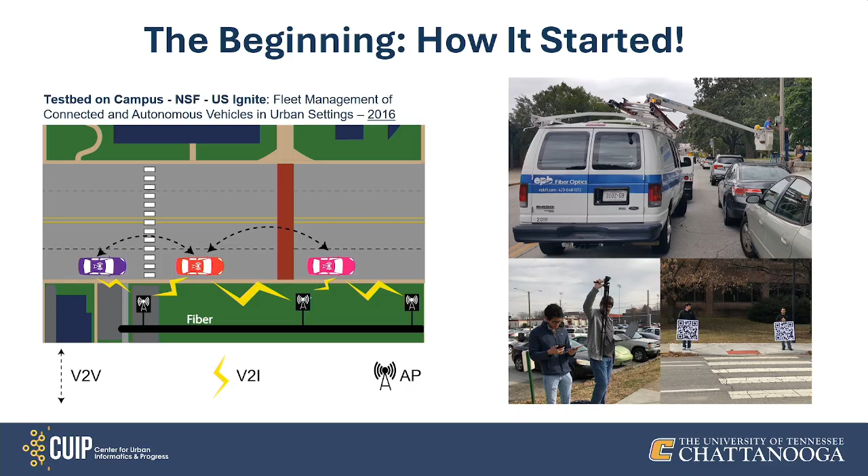And it worked. We did a live demo in Austin, Texas, as part of the World Congress for Smart Cities. It worked, we showed the impact and everything.

But that was also when we realized where the challenges are that we have when working in the world of ITS. Number one is lack of data, lack of real world data. There are a lot of test tracks or offsite places that can collect data, they have data, but what data do we have that comes from the real world, and also diversity of data, the data that shows how the system works under different environments in terms of weather, in terms of geometry of the roads and all of that.

And also quality of the data. If the data we collect, whatever it comes in, how can we work with it no matter how it comes. And also, being able to, so we have the data now, but what are the things we can do with this data, and how can we actually test it and see the impact of it, again in a real world scenario.

With all of that, we started, as I mentioned, with the academic, government, industry partnership to get the idea, develop the algorithms in the lab, get them out, test them, and then see the impact. At that point we see what we want to do after that, like how do we want it: is this a scalable solution that can be deployed, which I'm going to talk about some of those, or is this something that was really good research that we published and we can move on.

With all of that in mind, this is where we are today. So we started with those QR codes and poles, cameras on poles, but now our technology has been deployed. You can see this intersection is about probably close to a mile from the Aquarium. If you go down Broad Street to MLK, and when you hit MLK, if you look at any intersections from Highway 27 all the way to Central, you will see a combination of this.

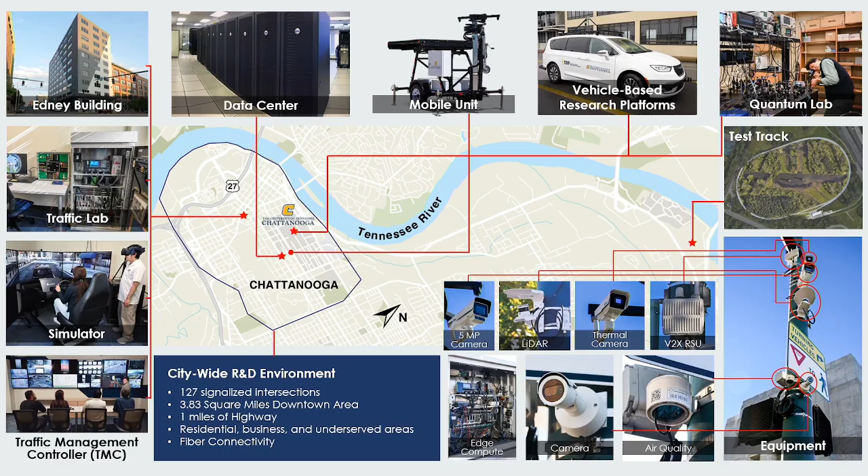Some other things I'm going to be talking about, this is just a general slide of some of the assets, some of the facilities we have, how we really do a lot of our work. We collect all of that. That's a real world; we collect a lot of that.

One of the things is, whatever algorithm we develop, I really want to test it before going out and taking a street to test it, because that's not the safe way to do it. So we do have a lot of capabilities to test it on the test track that you see there, that's an area about 6 miles, a campus where we do some testing. On the left side, we have a traffic lab where we do some studies. We have a connection to one of the intersections where we test some of the technologies. We have a simulator that we do a lot of testing on, and I'm going to show you that. And we have a team that tests some of the technologies there.

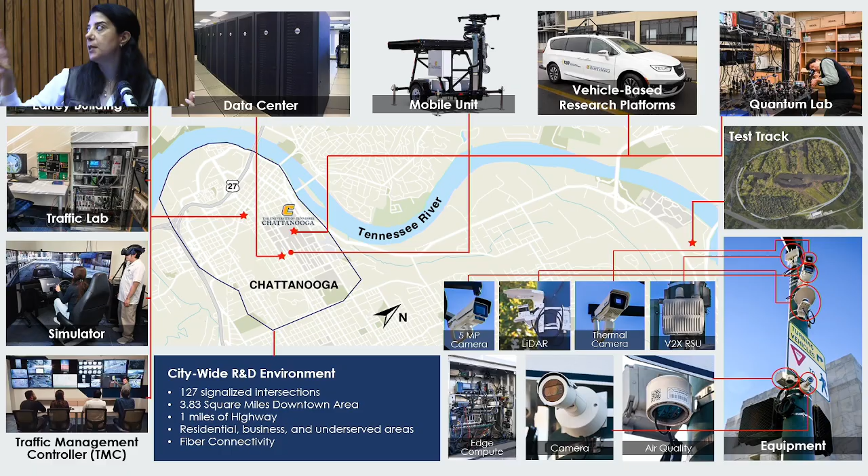But the beauty of this is it's not just hardware. A lot of time was also spent on the data infrastructure part of it, and we call this test bed as a service. Because, while I come from a computer science background and do a lot of data analytics, we don't expect everyone who comes to use this test bed to have that background. They actually have other expertise that we don't have. So this is the way we have provided access.

Everyone can have access to the data. There is an SDK they can use for remote access, and we work with several companies and other universities, and Oak Ridge, who have access to our data that they can work with.

Currently, if I remember the number correctly, we collect over 2 billion data points a day from just that intersection. So there's a lot of data that we collect. One of the main things is we process the majority of that in real time, and we don't store any raw video data.

One of the things for us when we decided we needed this and built it was community engagement, and one of the very early privacy challenges, because this is a regular street, your business, people live there, people have businesses there. So one of our very first promises that we've kept is that no video is being stored.

What we do is collect the data from that. We know, and we call them objects because that's what it's called in computer vision, how many objects there were. For example, two people waiting to cross - we don't know anything more about them. There were two cars that had to wait, say 5 minutes on the red light. Those are the kinds of information we collect, and that's about it.

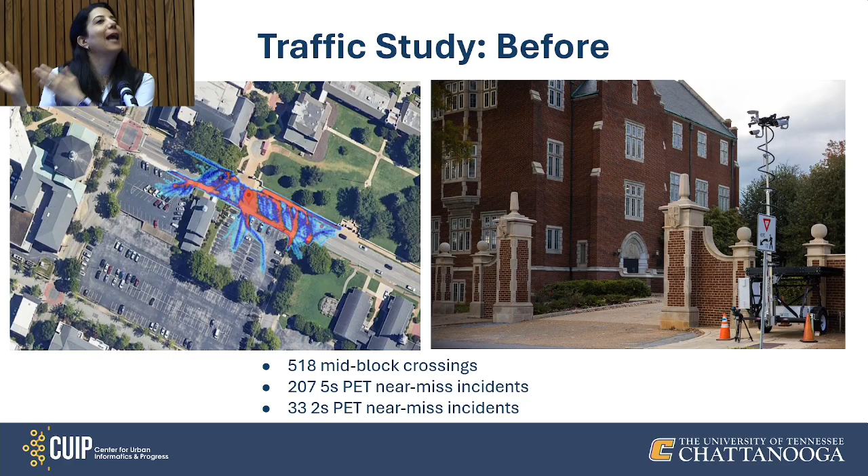We saw that 518 people crossed at mid-block, and they cross basically anywhere. One major challenge is the last bullet there: 33 cases where there would have been an accident within 2 seconds. Thankfully, there was no accident. Usually what happens is something happens and then we go back and look at it to see what happened. But this let us be proactive about it, because seeing 33 cases is an alarming number.

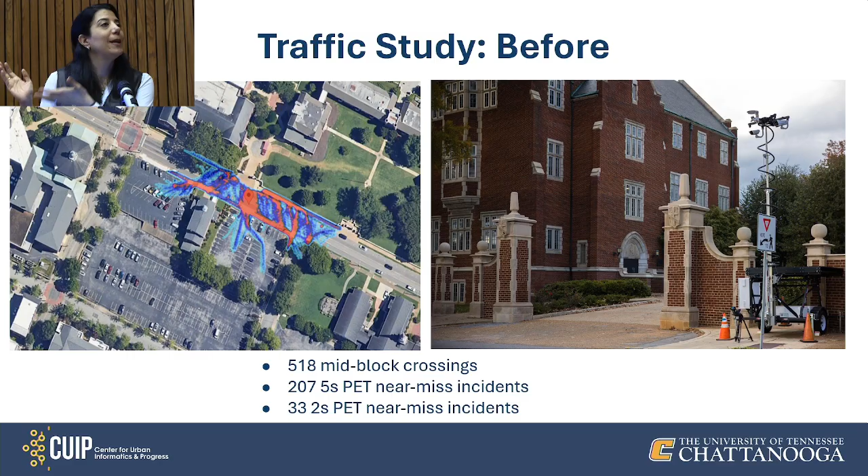These are specifically between a person and a car or a cyclist, not between two cars. We looked at a vulnerable road user and a vehicle. So we showed this data to Chattanooga Police Department, University Police Department, and City of Chattanooga Public Works, and they painted that crosswalk. Nothing fancy, literally just painting that crosswalk there.

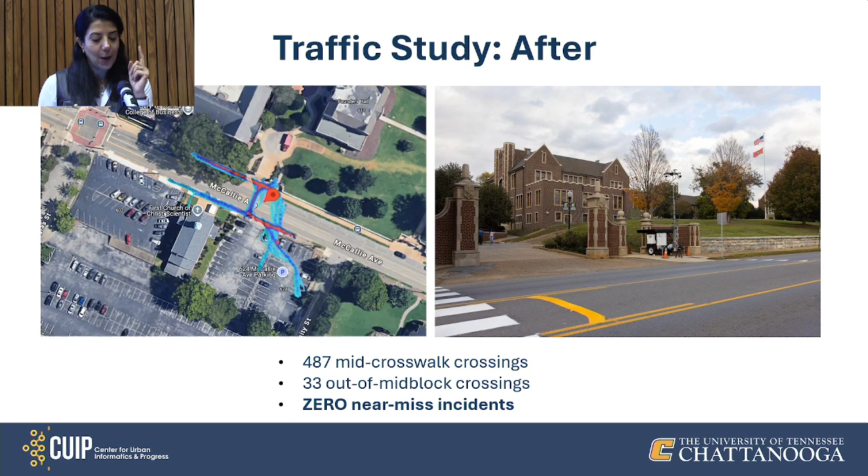We deployed the technology back for 4 days. The other one was 518 crossing. The results show 487 cases of very similar behavior, and the majority are now crossing at the crosswalk. There were only 33 cases of crossing outside of that mid-block crossing. But what I want you to see is zero near misses.

Now what I really want to show is what we are trying to do: see how can we proactively make the streets safe. To do that, we really need to have access to that data, analyze that data, and make a holistic view of our environment. That's what we have been working on.

One of the other things that has become very relevant for us, as a university, we usually do not look at economic development impact, because that's not in our criteria as faculty or students. But we have been working closely with companies, specifically in Tennessee, that like the work we are doing. You see examples of projects, for example working with them on risk assessment and post-crash detection. Denso has capabilities with these cameras and connected roadside units, and this is really being able to test their devices on the street and helping them develop the algorithm.

With LG, we are going to be deploying the first smart crosswalk. I was actually there last week for a visit with them. Smart crosswalks are everywhere in Korea, and you see the impact of it. They detect there is a person on the crosswalk and can alert, or in some cases when it's dark, just put a light on the person so they know there's not enough time to cross, or a car is coming that could potentially cause an accident. That would be deployed in Chattanooga - we are actually in the process of that. The other one is with the startup Aerobill.

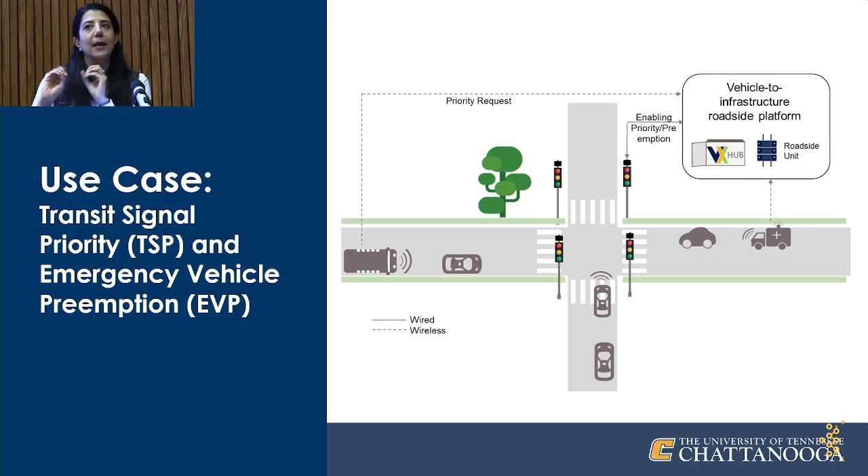So those are the things we want to be able to communicate. There are two things: one is preempt the road, but also being able to communicate so the autonomous vehicle or the regular driver knows whether it's on their path or not. The implementation we've done includes the OBU, the onboard unit, which is a unit we put on the bus or the emergency vehicle to be able to communicate that.

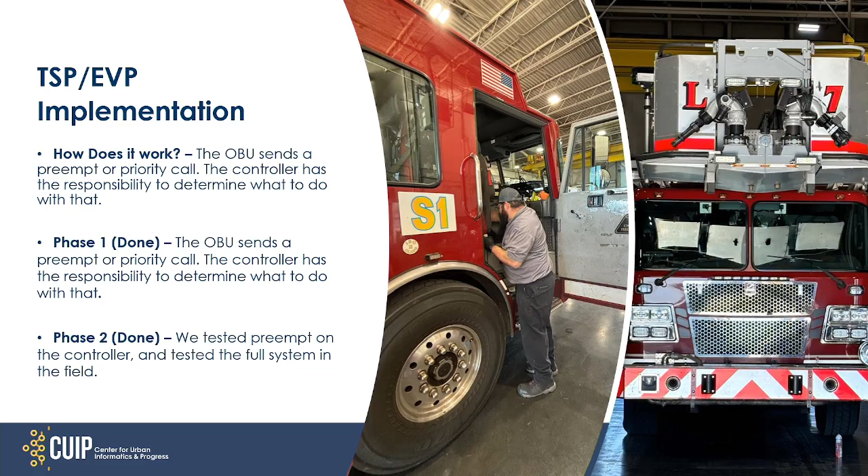And also really testing it on the streets to see how we do the integration. Our team has gone to the fire department - actually multiple fire trucks are now equipped with it - and we're making sure it will be able to do the communication. I have another video, but this is the case you'll see.

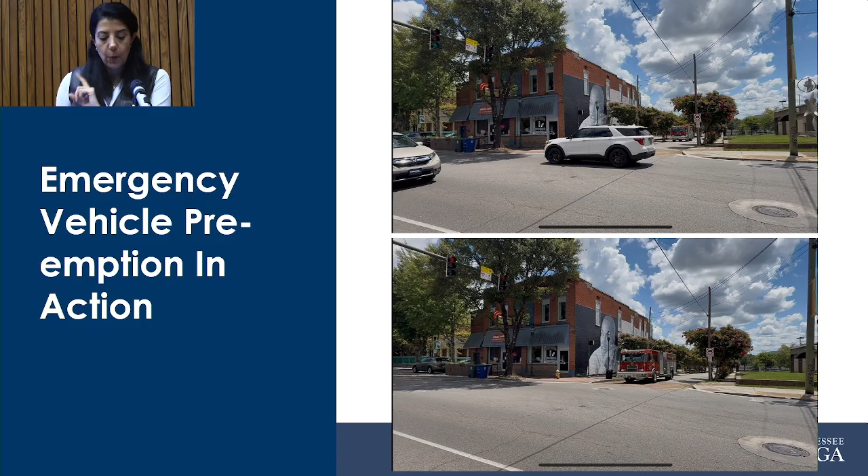You can see on top the emergency vehicle is coming, the light is green, red on top of that. But before it gets here, you see the other side is green, so the cars were going, but before it gets there, it had already stopped the traffic, giving the right of way to the emergency vehicle. I want you to pay attention to this part about the phase status and the pedestrian.

This is MLK and Market Street. You see the emergency vehicle, the fire truck, come from the bottom and go to the top. They already had the green light, but it's also making sure it's locked - you'll see the vehicle come, and then the phase status locks the other ones on red, including the pedestrian signal.

That's another challenge when we talk about the real world - we actually had a case where the light was already green, so they didn't have to do anything, but we needed to make sure it extends the red on the other side, because it was actually ending, and it made sure all side pedestrians were also red.

One time when we were doing the test, there was a pedestrian, and this was done in the lab - we emulated it, we weren't on the street doing it. There was a pedestrian there, and there's a minimum time to allow it, which was 3 seconds, but that was not enough for that person to cross. So we need to consider all of those conflicting cases before being able to test it on the street.

Another case is cooperative perception. Cooperative perception is specifically important in the case we see on the right side here, for midblocks.

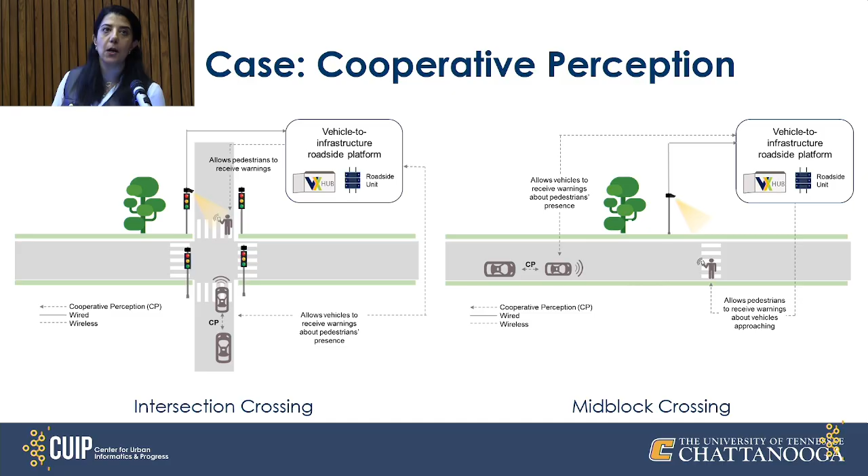In fact, there was an unfortunate fatal accident here in Chattanooga a year or a year and a half ago that happened exactly that way. Somebody very early in the morning crossing at the crosswalk, but the car did not see it because it was completely dark. So this is the type of thing we are doing two things about.

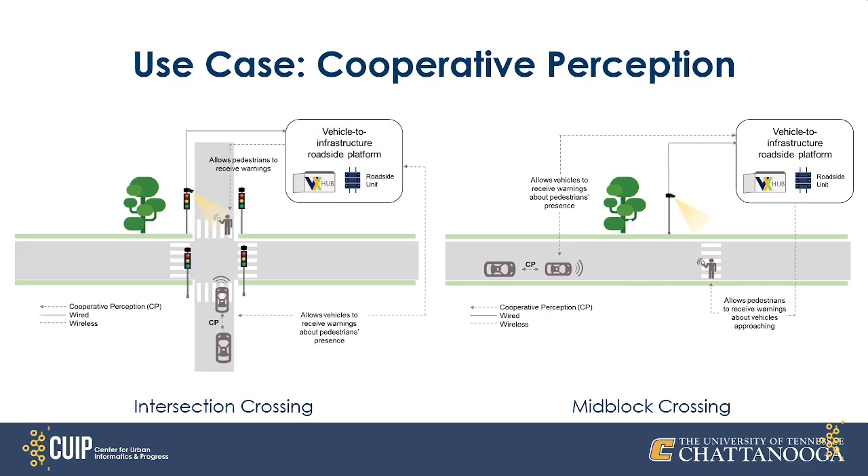One is if the person is seen, it's broadcast, so the car would know that there is a pedestrian on the road. The other thing we're doing is working with another industry partner on a light that lights up when it's dark to show there is a person on the road. So these are, I'm going to show you a couple of quick examples.

So what you see here, this is MLK and Central. The one on the right is a camera view. The one on the left is a LiDAR, which we use for all of our research projects, and it's actually deployed in the city, so they use it for other purposes too. And what's in the middle is what the driver sees.

So the little yellow figure is the person that was walking. And you see on the middle view, all of a sudden the PCW, pedestrian in the crosswalk, comes up so the driver would see it. We do it both with a message coming up on the screen and also sound, so the driver becomes extra alert.

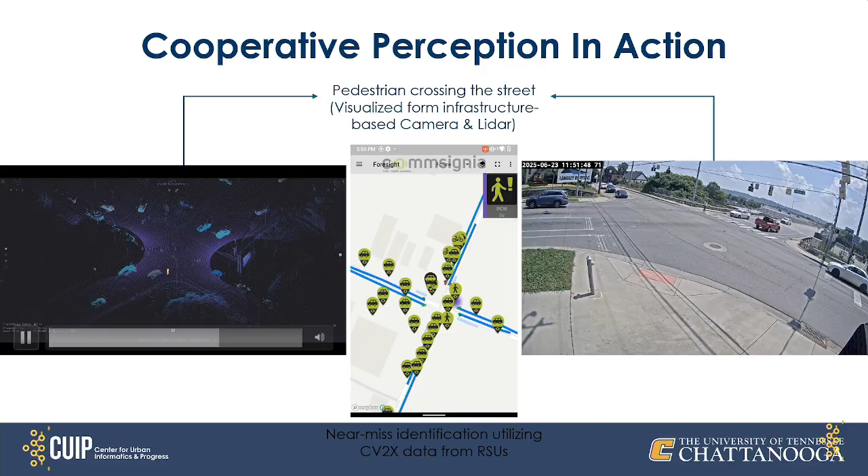But we have also defined zones so that only when the pedestrian is in that zone does it trigger, because one of the challenges we have is distracting the driver and distracting the pedestrian. We don't need additional information to distract, but when it's important, we need to receive it. So what are the zones we want, and what is the time threshold we need to really convey that message - that's what's happening there.

Another example, and this is the case with one of our partners in this project, Audi. Audi has actually integrated that into their HMI. So you see that person - that's the way they would see it. It's right there in front of them on the windshield, and then there's a sound that comes up, and you would see this person coming up with that as well.

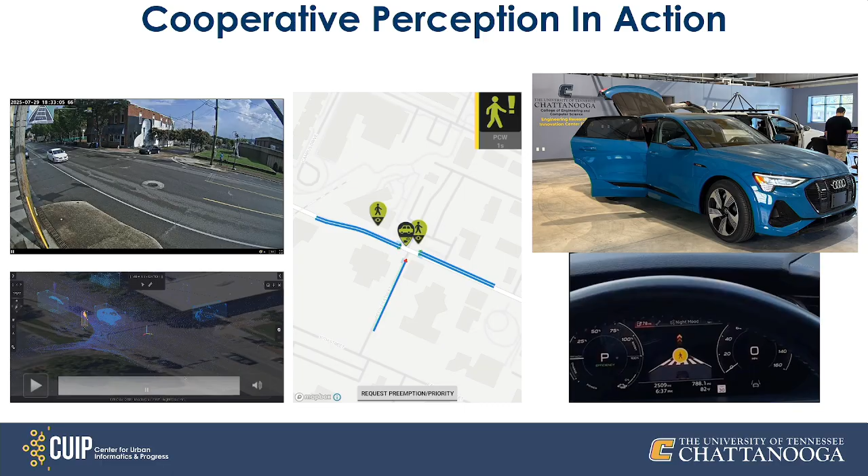It's a crosswalk - this is mid-block. That part is like the actual crosswalk, and the pedestrian walking is on the other side. So that was the case that we also tested.

Okay, so another part - I'm shifting a little bit from connectivity to digital twin. One of the things we have been working on is building the digital twin of this. Because we have a lot of data, we collect all of this data basically 24/7, and we have built this twin.

We have built the twin more accurate for the corridor, because the camera data comes in at 30 frames per second, and we have signal phase timing data that comes at 10. So we have really accurate data - we can build a real twin of that.

We also understand that's not always the case, because in some places we don't have that technology. But even for that, we have looked at average days based on the OD data we receive from our planning agency, and we have built a twin for that.

We have done several projects so far - I'm going to talk about one here. We did a project where the city wanted to see, they were planning a road diet on one of the streets in North Shore. And we modeled that, which is what helps, because we can do a lot of safety analysis on the twin, so we're able to see before and after.

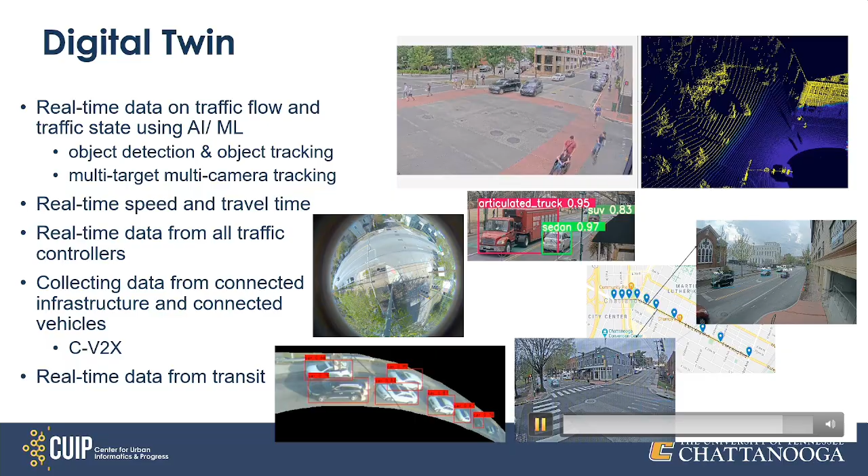So we do not look at license plates. But we also want to understand if the vehicle passes through multiple intersections, we want to be able to know that - for example, to know what the travel time was. That would be the only way for us to understand that.

So this one at the bottom is actually that - it's multi-camera, multi-target detection without using any identifiable information. Based on that, we have built a twin. This is MLK - what you see in the middle is MLK, a 2D version, and this is the system we were talking about earlier.

This is a 2D model of MLK, and everything you see there comes from the real world. The number of vehicles, the status of the light, how many vehicles were in the queue, all of that is in real time. But the colors and type of vehicle are random. We've done this for all parts of the corridor.

So how did we use this? This was actually in partnership with Georgia Tech, University of Pittsburgh, and Oak Ridge National Lab. How did we use it? I missed that slide, but I can explain it.

One of the projects is adaptive traffic control. We wanted to understand how we can optimize traffic controllers so they react to the existing traffic status. A lot of traffic controllers look at loop detectors, cameras, LiDAR, or similar inputs.

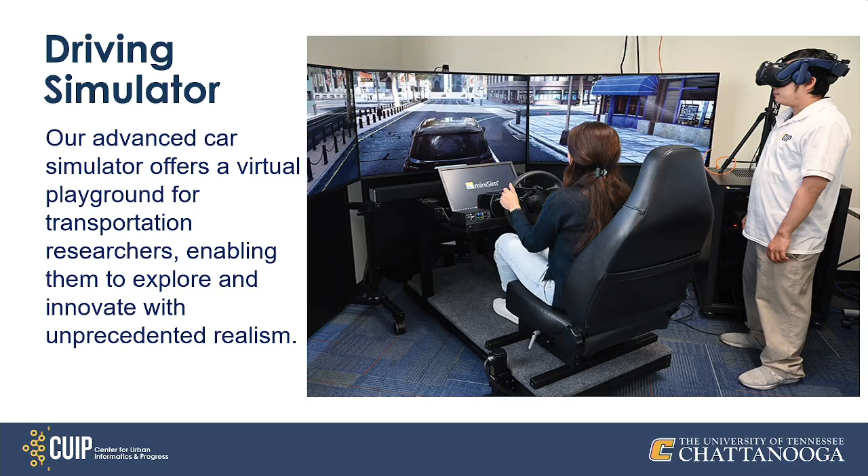The other way we are testing that is using the driver simulator. We have the digital twin of our corridor there, and we've done many different tests for both autonomous and regular driving with the driver. We put people wearing VR so they think they're on the road, and see how they would react, especially the interaction of human behavior with pedestrians and autonomous vehicles. We really built the model to be as accurate as possible.

So this is the MLK corridor, and this is the model we've built. It's almost the same, down to the pavement type, the signage, all of that. We created a very close 3D model of it, and we've run many different test cases.

You can see how those people were standing there, but the age, height, and clothing are things we randomize ourselves. What matters to us is how long people waited to cross the street, which relates back to the adaptive traffic control work I mentioned.

I don't need to tell you all this since you're the experts, but when I'm talking to computer science people about optimization, we can't just optimize the road for cars. You can't just say pedestrians should stand there for 5 minutes because I need the cars to pass through to improve travel time. That's why it's important to account for all modes of transportation.

Another project we're doing is on driver distraction. We use meta glasses, which is what you see that student wearing, to look at where drivers are looking while driving. We provide different distractions, testing these scenarios multiple times with many different students, to understand how things change when the type of road, curves, and so on change. We also study the grip and position of their leg.

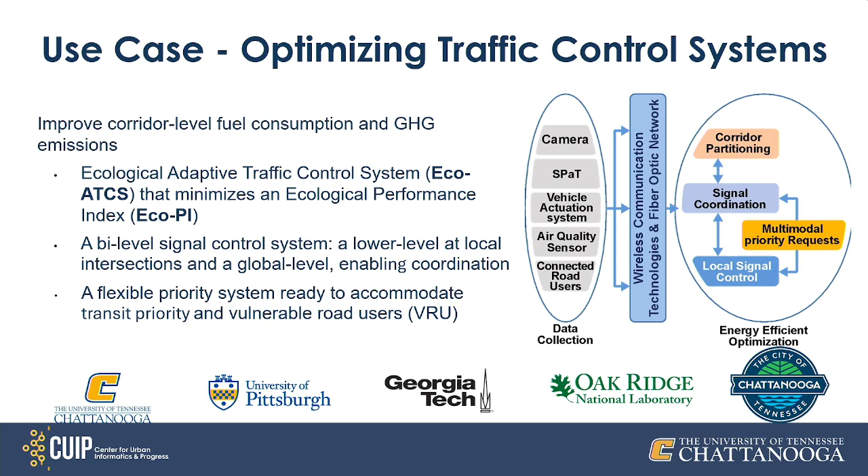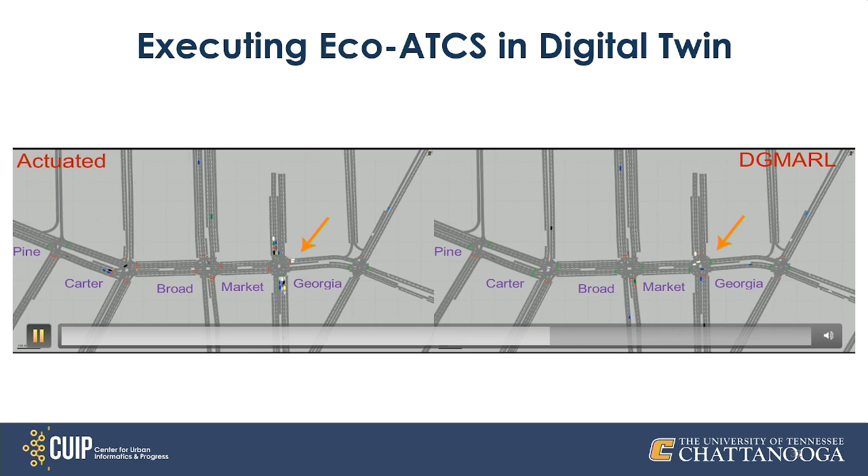We have tested this over a long period of time, on peak time and non-peak time, over several days, different times, different seasons, and all of that. We had to fine-tune the algorithm multiple times.

One of the other things is because of our partnership with Oak Ridge, we were able to run it in a hardware in the loop. We were collecting this data for one of the vehicles that Oak Ridge lab has, running the code, and we actually measured how much energy it was using and how much emission it generated.

The last thing I wanted to talk about is related to autonomous vehicles. One of the projects we also have is related to automation and connected vehicles. We have the vehicle in the bottom, which is a regular vehicle. It's not even level 3, probably level 1, because it does not have any intelligence. But what it has is we have added the onboard unit.

You see those triangle or cone-shaped antennas on top. Those provide us the connectivity, so we know where the vehicle is and it knows it can communicate. At this point, all it knows is it can communicate to the traffic controller, so it knows how much time is left on the red and that type of information. The vehicle and the traffic controllers know how many cars are coming to understand the messages they send.

The vehicle on top can actually be a level 4, but we are using it as a level 3 because up to this point, Tennessee has the rule of having level 3 vehicles on the road requiring an operator in the vehicle. It can be fully automated, but we are using it as level 3. The application isn't building a vehicle that's fully automated — this is a vehicle retrofitted through our partnership with another company. We added the sensors and built the algorithms with them.

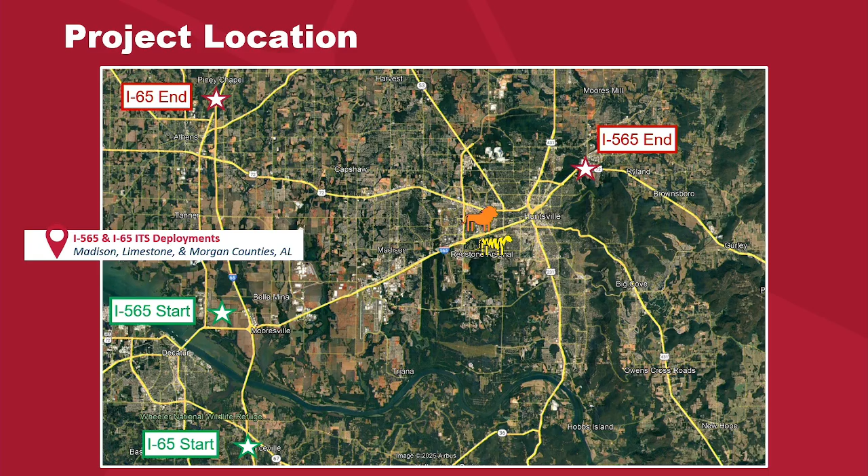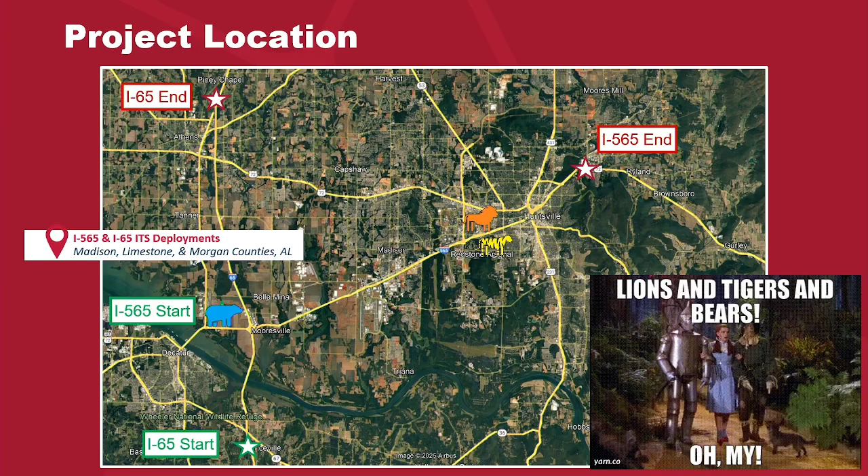There's also a district office. The Huntsville district office is right down the street, so we had connections tying back to there. They have an IT server room as well. Then the Tanner district office, on the west side, connects the west region to the east region, combining the west area with the east area to make our north region. So you have the district offices, regional TMC, and all of that needing connection.

There's also a lot of regional coordination as part of this project. Alabama DOT is obviously the main client of ours for the project, helping us do this work, but Redstone Arsenal was also heavily involved. If you look across the 565 corridor, you can kind of see Redstone Arsenal under the Tiger, but all of that land is like 60 square miles.

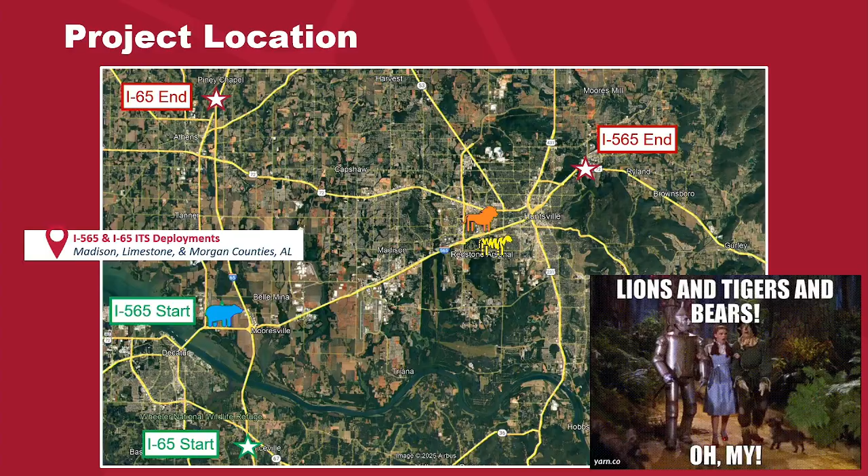Going along the 565 corridor, we had to coordinate with them on a lot of the technologies we put out there. For instance, putting a CCTV camera up, we weren't allowed to let it see the base for security reasons. There was also Huntsville MPO, Decatur MPO, lots of FAA coordination with Huntsville International Airport, Redstone Army Airfield, as well as emergency responders like ALEA, the law enforcement agency of the state.

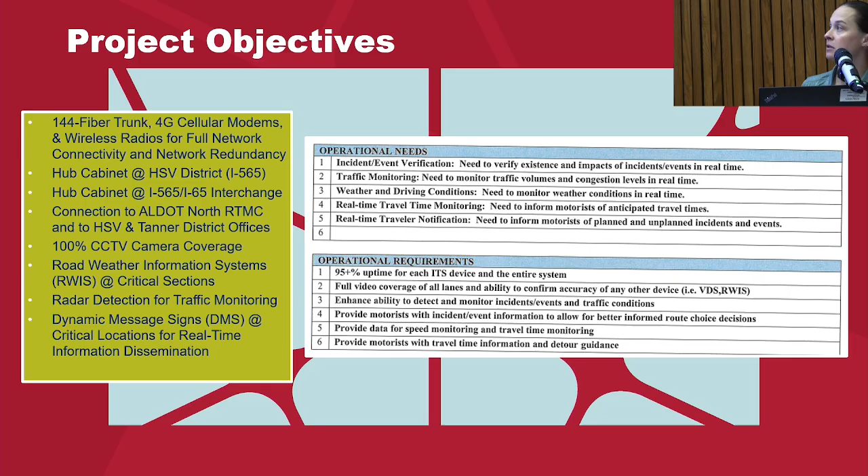We also installed a few DMS boards, dynamic message signs, and we'll talk a little bit more about that. There are road weather information systems in some critical locations, and a few other technologies that you can see there.

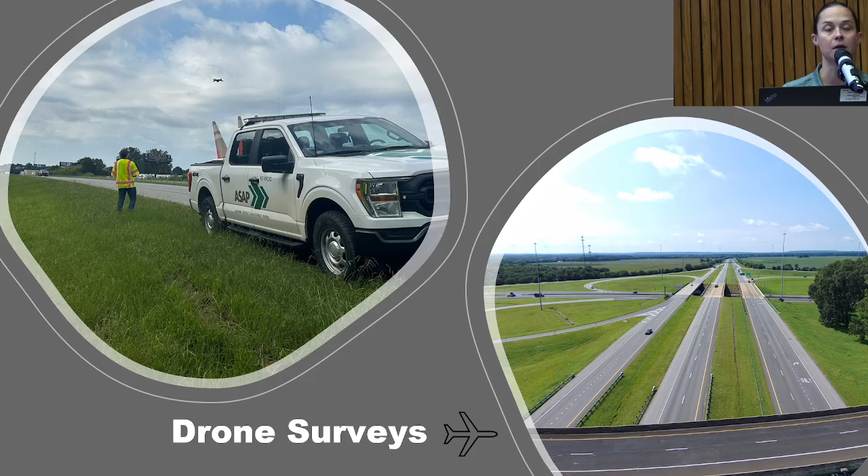One of the cool things we introduced to ALDOT as part of this project was using drone surveys for the CCTV installation design. Knowing that their ultimate goal was to get 100% CCTV camera coverage, we brought in one of our drone pilots, who has an FAA pilot drone license, to work with us and get the FAA permits to get out there and do it.

You can kind of see here, this is at the I-565/I-65 interchange. It gives a good eyes-in-the-sky view of what that camera is actually seeing, and it gives you exact coordinates of where you are. I could actually go to an example.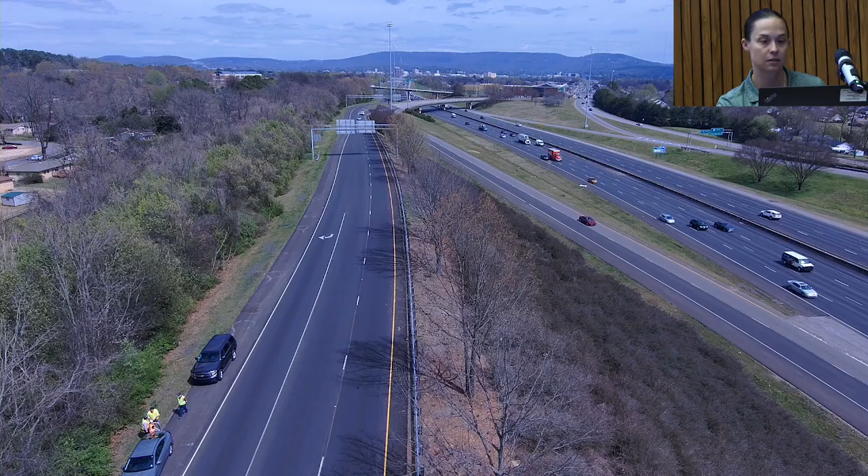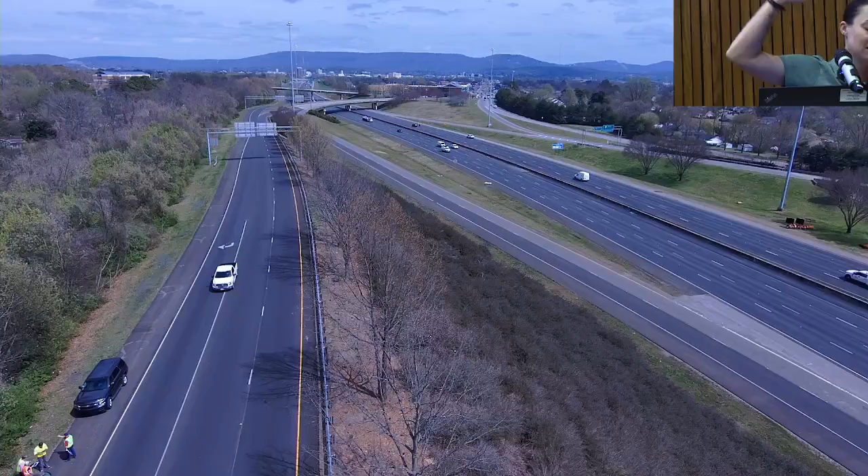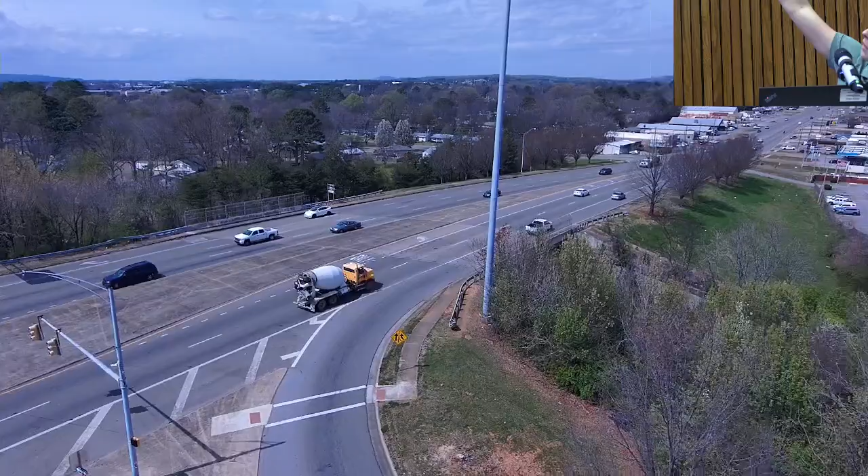So here, if you look straight, that's Governor's Drive, which is a main corridor to our medical district. Here's I-565 looking east to downtown. Jordan Lane here is another major arterial running north-south, and then 565 west is that way. There we go, Jordan Lane going north.

One of the benefits of the drone surveys is we can really nail down where we want these cameras to be, the pole locations. They give the exact height of the drone, so we can figure out the lowest pole height we can install, how high we have to go, and where we should install it. It'll give the exact northing and eastings, and it's just a really cool way to get a bunch of options.

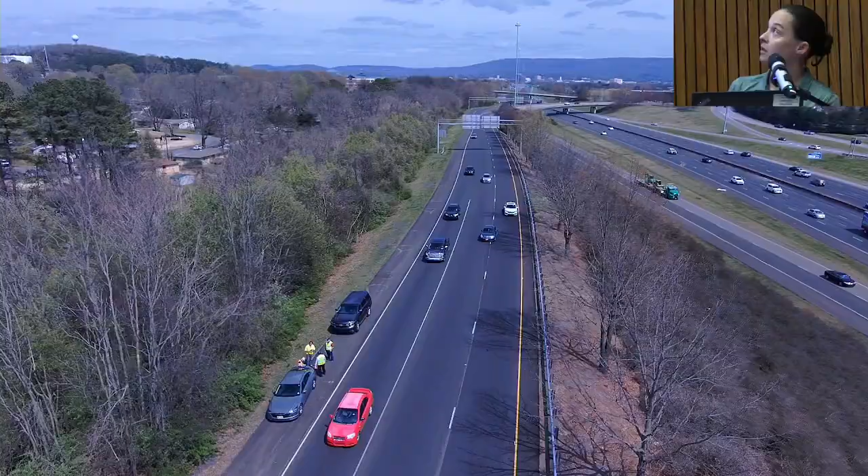We used to actually go out in bucket trucks. You'd have to set up the bucket truck, go out in the sky, and you were typically limited to like 40 feet. But now we have these technologies that let us really get all of your options, while getting some motion sickness at the same time.

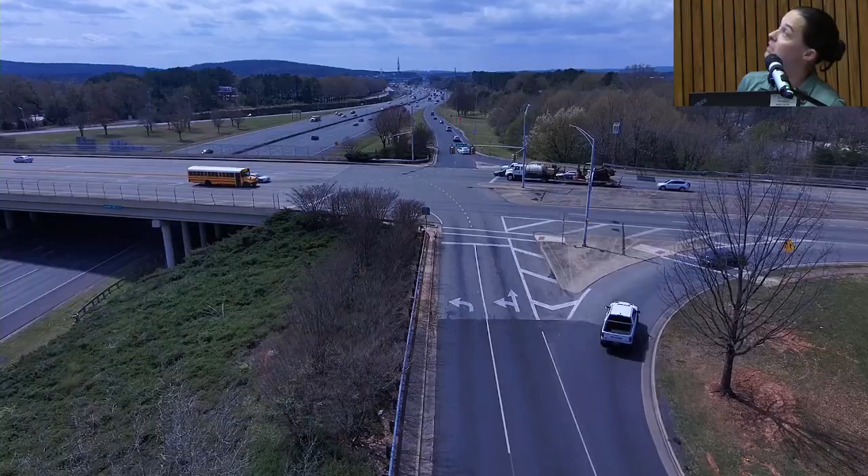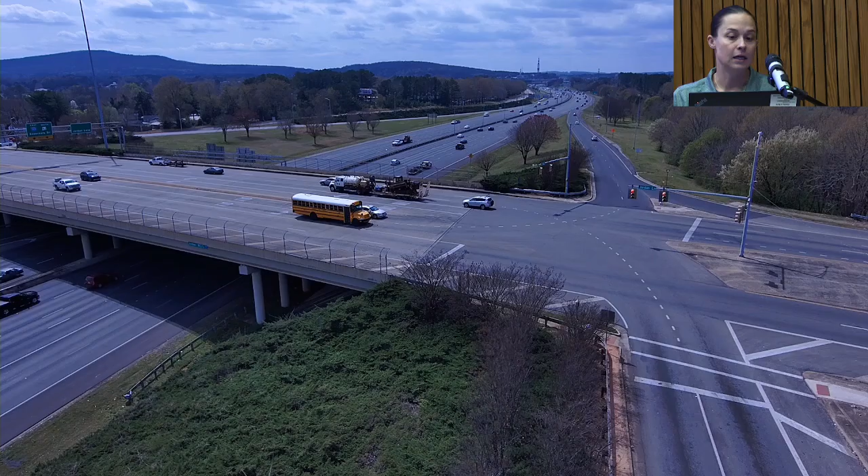You can see the iconic Huntsville rocket there in the distance. This one we actually ended up installing right in this grassy area, which gave us phenomenal views of 565, as well as Governor's and then Jordan Lane as well.

This is just a little bit further eastbound, right before the elevated portion of 565 going into downtown. You'll be able to see here in a second the horizontal curvature of the roadway, how you lose sight, tree coverage, things like that.

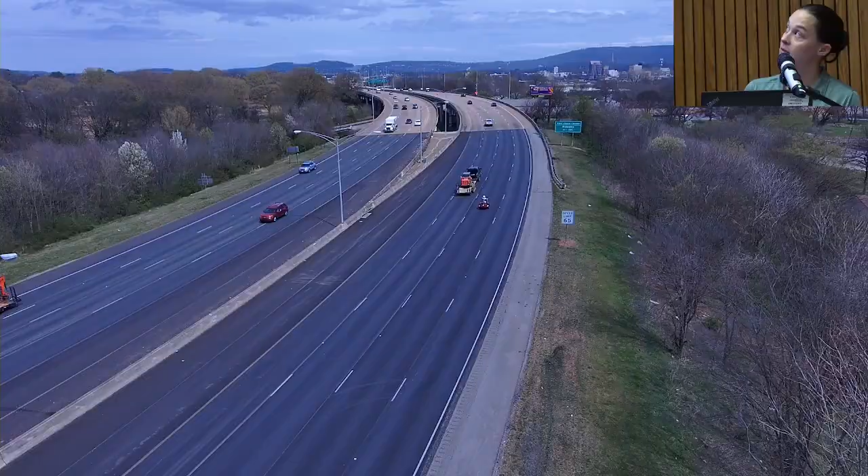So we were able to really hone in on where we wanted to show. You can see there, like you kind of lose around the bend, you lose your line of sight. So we can fly our drone until we get what we want to see.

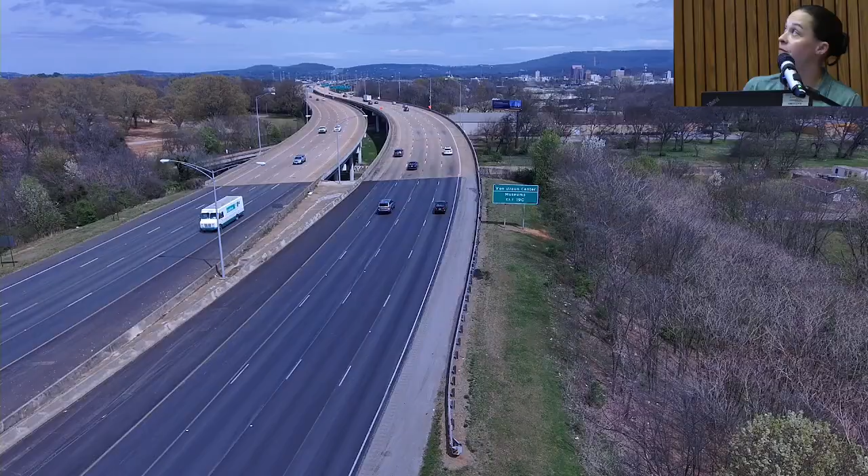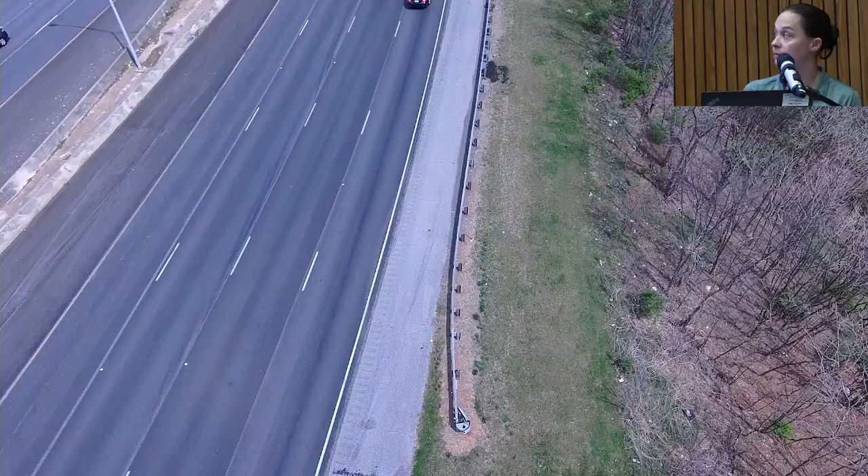You can look down and see what's at the ground there, is it a feasible option for installation. Now you can see you've got much better camera coverage going through the downtown area, and going westbound you've still got great coverage. So we ended up installing this one, utilizing existing guardrail right about in this area.

Going back to the FAA permitting I mentioned earlier, across the 565 corridor we had the Redstone Army Airfield right there, and right where the purple ends is the Huntsville International Airport. Both runways are north-south for all intents and purposes. So on the 565 corridor, the red line, we were installing 70 to 100 foot poles, and ALDOT will go to 120 foot for some of their CCTV cameras. So we had to get these FAA permits in.

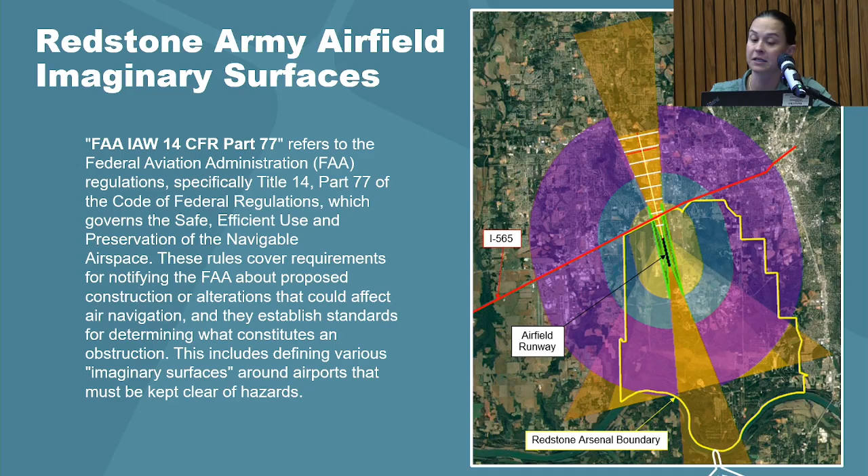So this is the imaginary surfaces, but essentially each color represents a separate surface area with its own height requirements that have to be evaluated by the FAA. As part of this, you can use the FAA's notice criteria tool, which is up at the left.

So you can put in all of your data for what you're installing, your pole location, the height, what you're putting on there, and it'll actually tell you yay or nay if you need to apply for a permit. The things that typically factor into that are the height of your structure, the proximity to the airport, the location, and even the frequencies emitted from the structure itself.

Like, what are you installing on this pole? A lot of our poles had wireless radios on there, so it's stuff like that the FAA will take into consideration. We ended up having 2 poles that had to be permitted. Lucky for us, one was with Redstone and one was with Huntsville. This one was the Huntsville one, right at our minor league stadium interchange.

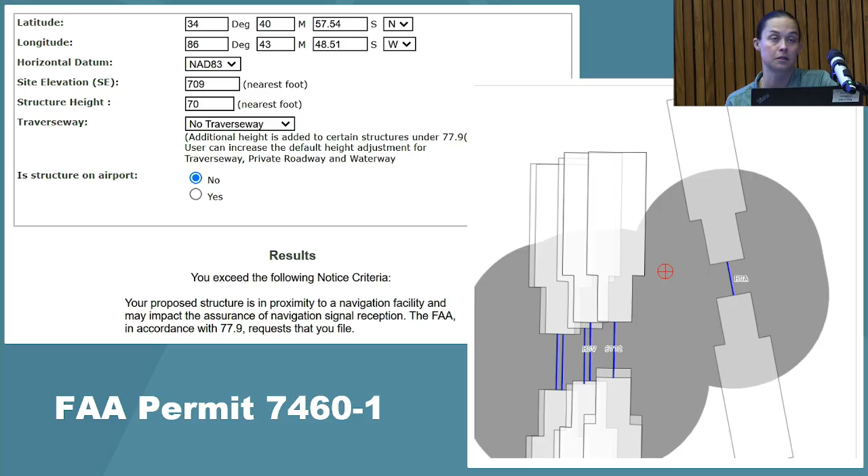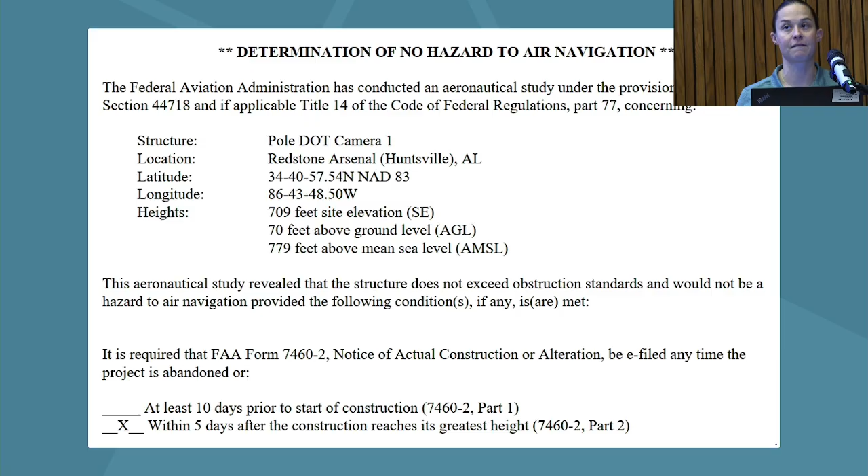And this is just basically the approved permit. So after the structure's built, you have 5 days to let the FAA know, like, hey, your structure's out there.

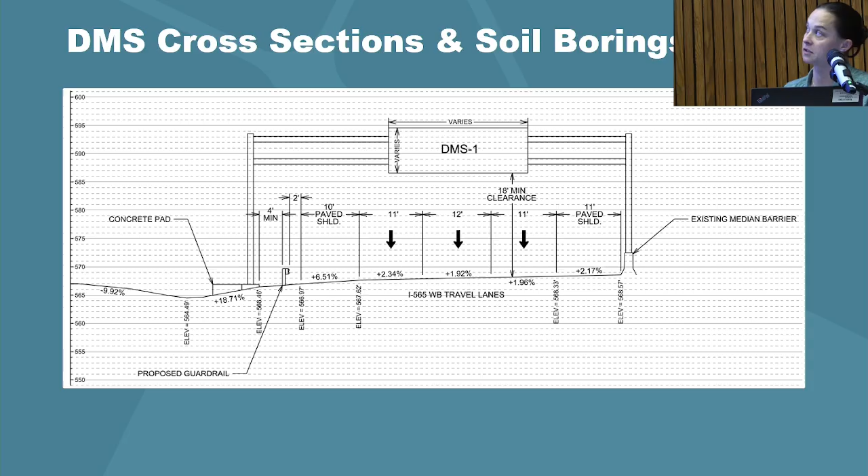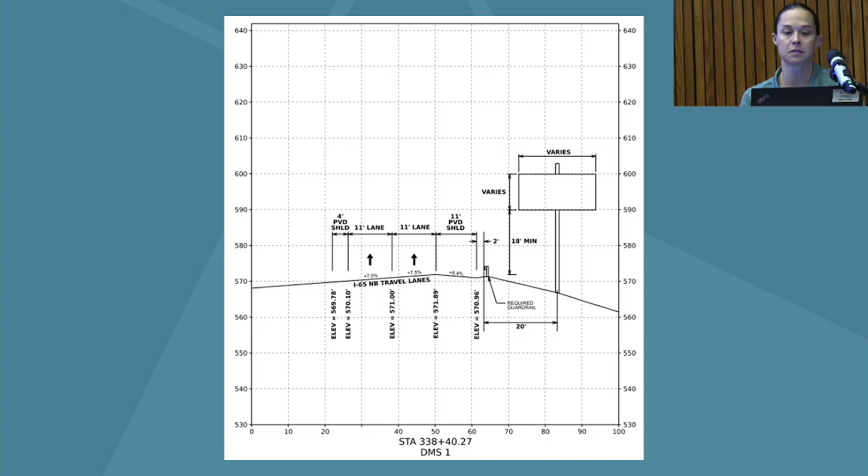For DMSs, we installed over-the-highway message boards on 565. Here were some of the cross sections for those. Typically you'll do survey and cross sections for DMS. For 65, post-COVID, with inflation, we ended up going butterfly mount for those DMS boards, so a little bit of a different setup.

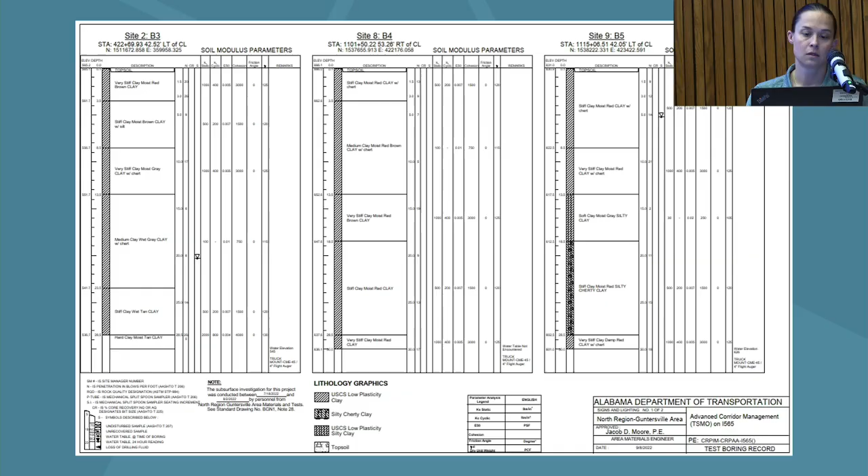Over-the-highway boards were well over $500,000. The butterflies were about half of that. Soil borings start to get into the foundations for your DMSs, but here's one of them that's built out there.

We also installed 5 or 6 RWIS, road weather information systems, throughout the corridor. This one here was at the easterly end of 565. 565 is unique as it goes through downtown - it's about a 2.5 mile elevated section of just bridge as it goes through the downtown area. This is kind of where it ends and it dips.

They have a really bad incident history here with crashes from black ice, standing water, things like that, so this was their top location that they absolutely wanted one. We ended up installing the Lufft all-in-one weather smart sensor, which you can see at the top of the pole, and it'll measure everything you see there. Also as part of that installation, you can see there's the cell modem.

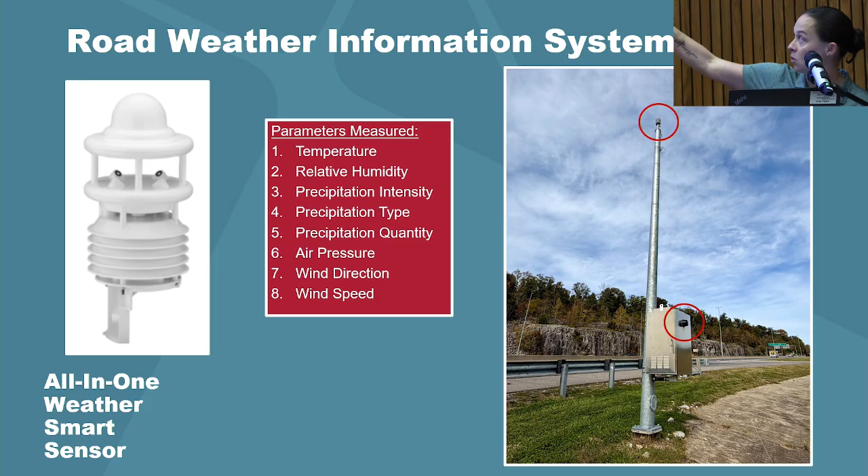But here, you can see the rocks in the background. Right-of-way was also a big issue in this area, so this pole, and then there's one more, was the end of the line we had as just cell for the RWIS.

Also on that RWIS pole is the analog infrared radiometer, and basically what that does is it uses infrared radiation, so it measures the heat coming off of the pavement. So it helps agencies pick up on black ice and snow. It'll send an alert to the TMC and they know, hey, we got black ice, let's go lay salt, or we have standing water, let's go fix it or address it.

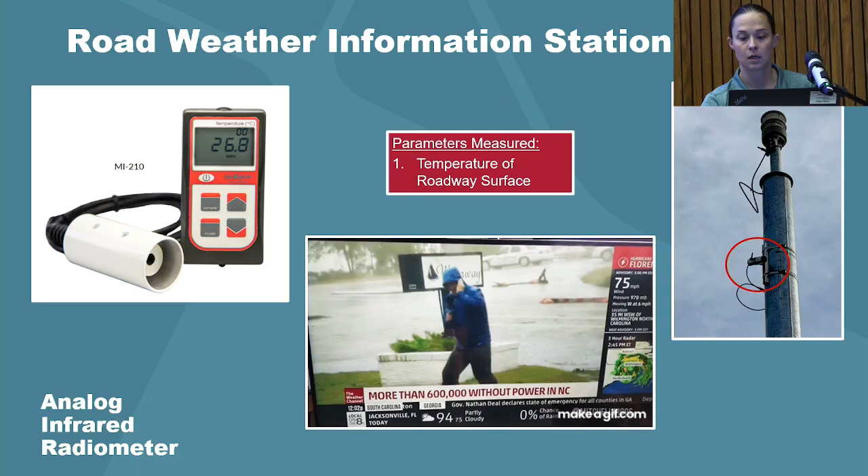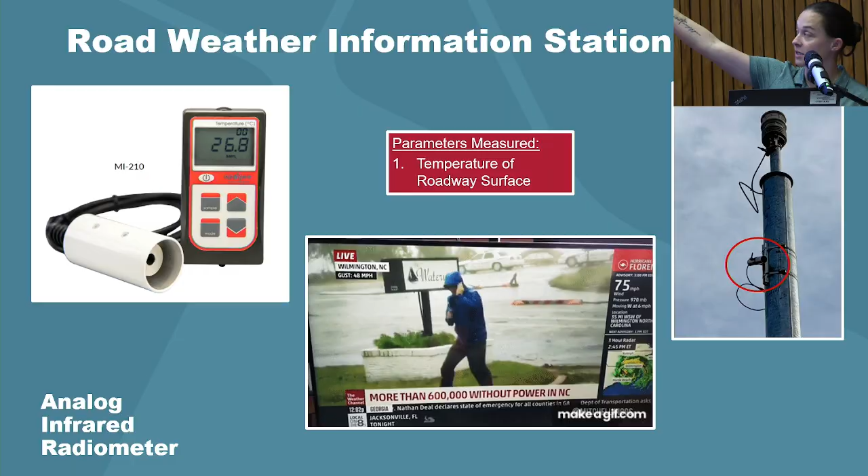And it's also good to just have real data, because I don't know if y'all remember this, but it looks really bad, but in reality you can see the guys walking in the background. So the data just helps us supplement what we see on the camera, like, hey, is it really bad or are we over exaggerating a little bit?

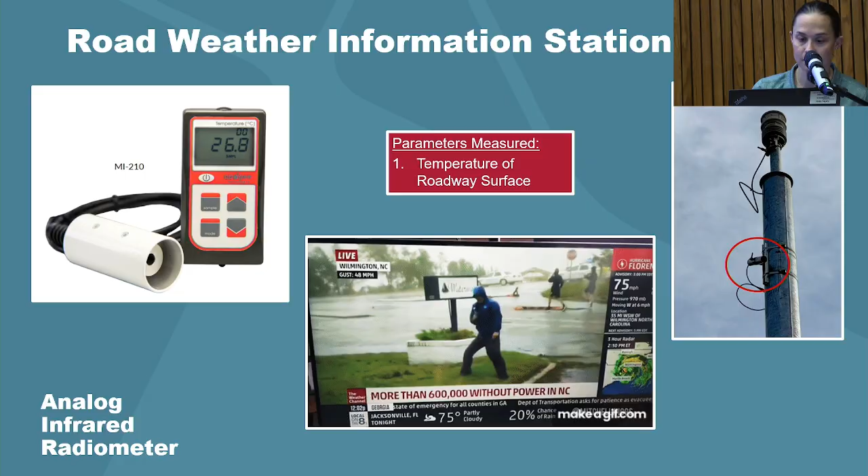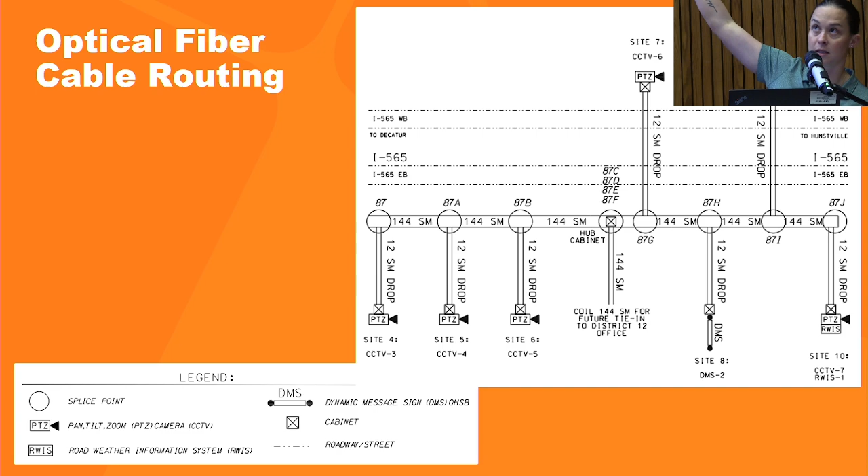Like I mentioned, we did a lot of fiber routing. We did have a few hub cabinets to tie into the district for future expansion. Just some of the fiber layouts we had - there's the hub actually going to the Huntsville district office. We ended up not putting the hub near the actual TMC because they lease the TMC, and their long-term goal is to relocate the TMC to an actual ALDOT facility. So we ended up putting it right near the district office instead and running a 144 trunk to the TMC for now.

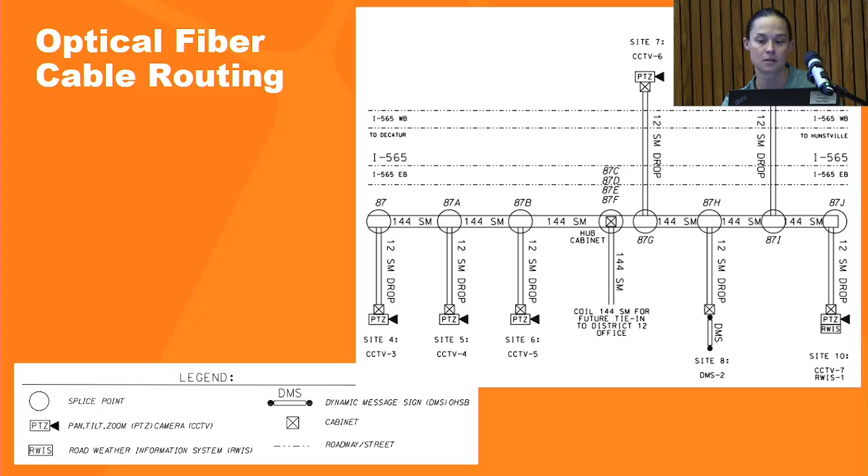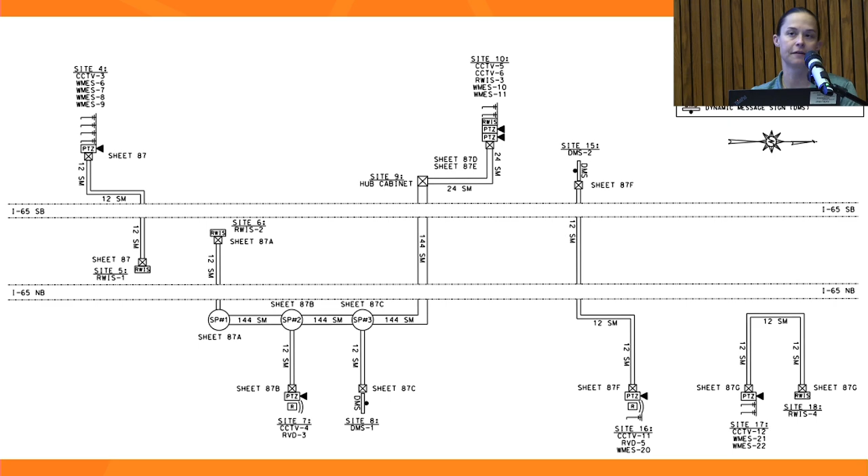Again, I-65 had some fiber there as well. This one project, budget was a little less, and we also had the Wheeler Wildlife Refuge going through the project. ALDOT did not want to open that can of worms, so we ended up doing a lot of wireless communications, and I'll talk about that in a second.

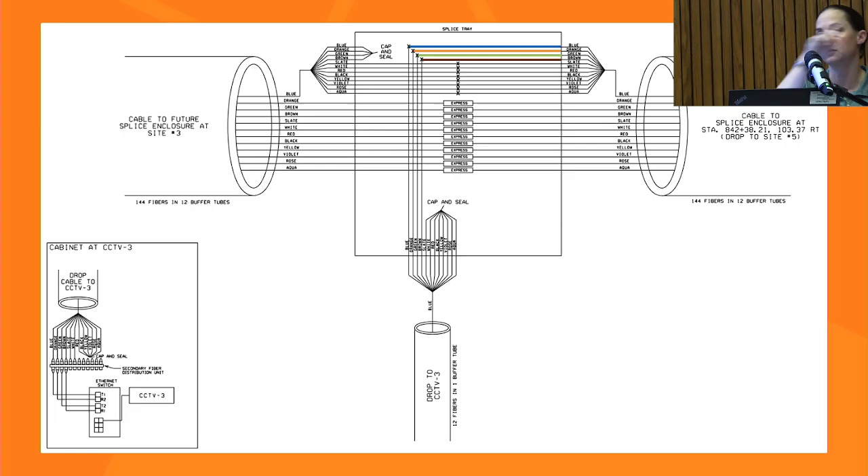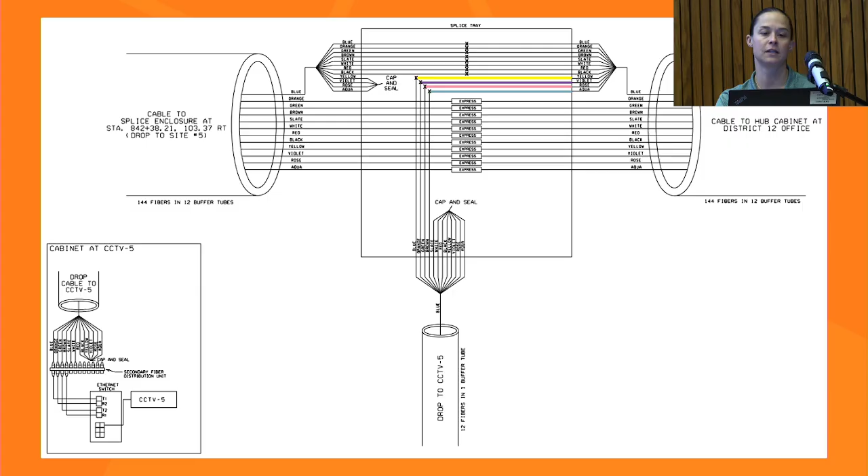But ALDOT in general, because we didn't have a closed loop system, we ended up doing just a folded loop. I don't know how many are familiar with fiber, but basically it lets you have some sort of redundancy without actually having a loop of fiber. So we did every third drop on a different communications group. You can see the first 4, the next 4, and the next 4, and then the next signal would be there, there, there. So that's kind of how ALDOT requested the redundancy to be done, so we obliged. But again, that's a folded loop.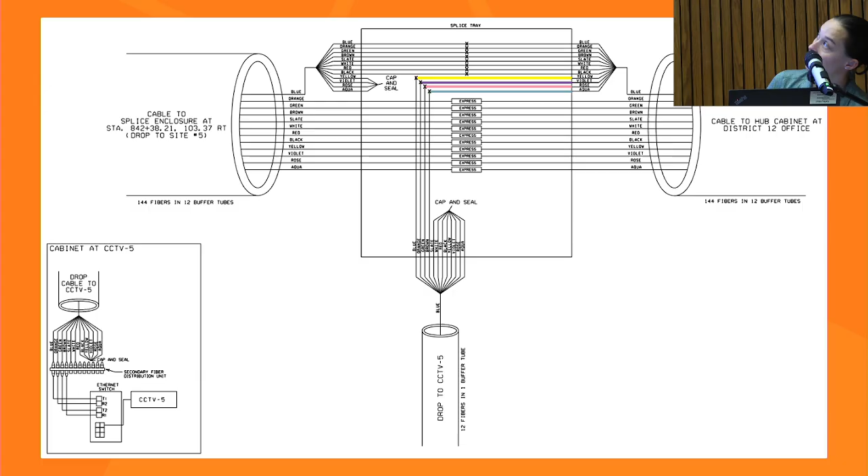Happy to answer questions after if you have any on that.

Actually, during our design, the pole at 565, 120-foot pole, started leaning. They were afraid it was going to collapse, so they took it down. So we were able to get our drone survey out there and determine, hey guys, you don't need that 120-foot pole, you can have a 65-foot pole out there. So we were able to resize their pole, shore up their foundation, and get that resolved pretty quickly throughout the project. So that was pretty cool to see in action.

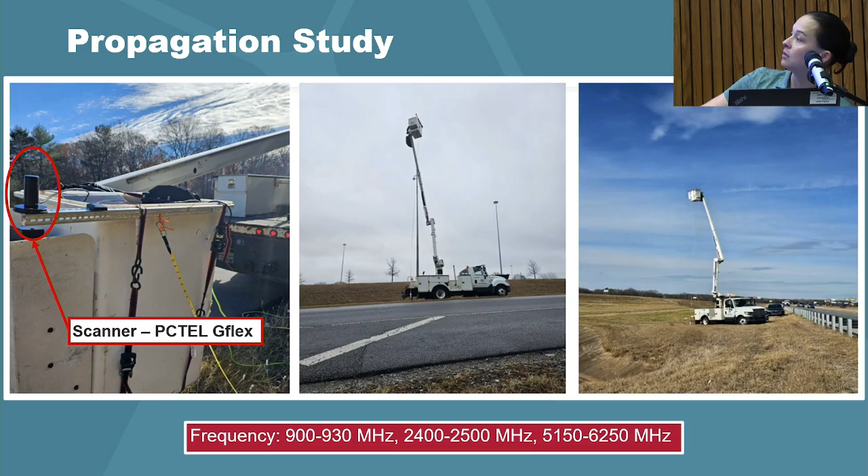So as part of the wireless design, what we did was a propagation study. As part of that, you have what's called a noise analysis, and a line of sight analysis. So what you do is you put a scanner - you can see it over there - take it up into a bucket truck, and get your data. Your antenna up there will collect the noise and the line of sight data. The noise data we collected at the 3 frequency ranges below. We'll talk a little bit about that.

So when you're dealing with frequencies, you have what's called licensed and unlicensed frequencies. With licensed frequencies, you basically have exclusive rights to a specific frequency on the band in a particular geographic area, meaning no one else can use it. So you're for sure going to have those rights no matter what, so it's reliable, you know it's yours, but it also comes at a pretty high cost. You've got to pay for that licensing fee. A lot of times you have to pay for FCC attorney assistance to get those - FCC is the Federal Communications Commission. And the equipment costs are a lot more expensive.

Examples of licensed frequencies are your cell networks, your Verizons, your AT&Ts, commercial radio stations, TV, things like that. You also have your unlicensed frequencies.

With unlicensed frequencies, anyone in the public can use it. There's a specific set of rules, but for the most part, if it's open, you can have it. There's no licensing fees, equipment's generally cheaper. There are some regulations, but not much to it. It's EIRP, effective isotropic radiated power, whatever that means. So that's the regulation you have there.

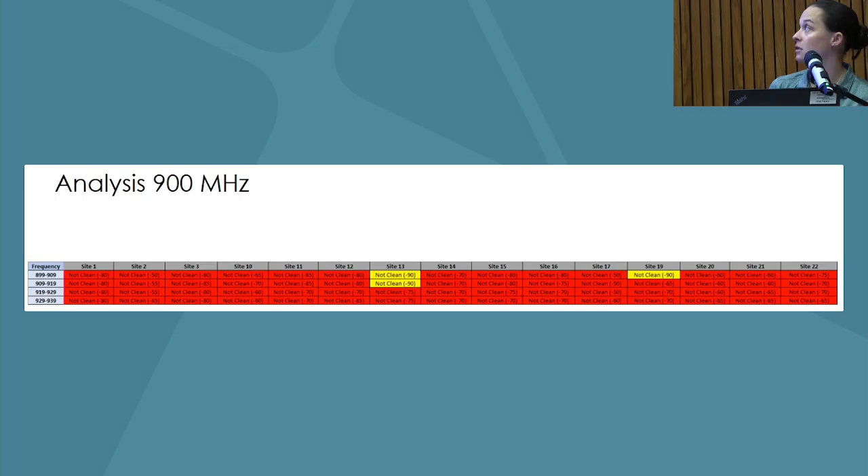Here you have the 900 megahertz, obviously not clean at all. 2.4, you're getting there, and then in the 5 gigahertz, which is what we ultimately recommended going, you had much better analysis results.

ALDOT uses the Ubiquiti radios. That's what they had out in the field. Ubiquiti does offer it in this range, so that's what we spec'd out, and that's what they're installing there.

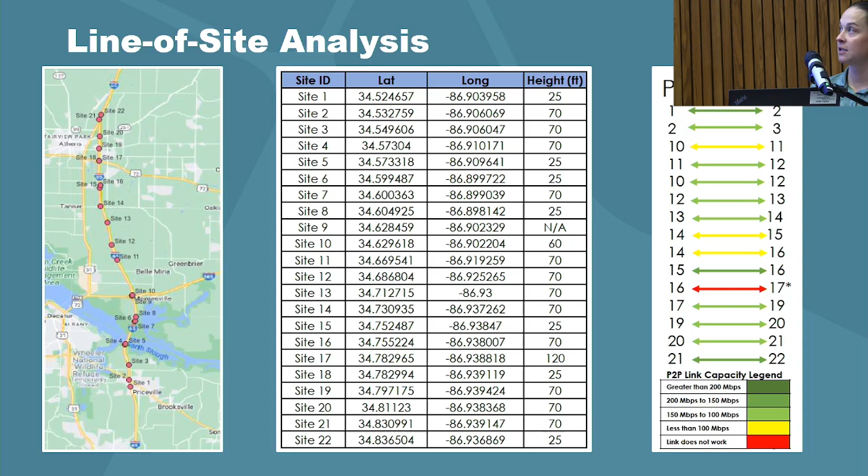We also did, as part of the propagation study, a line of sight analysis. Basically, can you see it? Direct line of sight. Is there a tree blocking? Is there a building blocking? Vertical curve, horizontal curve, whatever that might be. So line of sight is part of it.

So this was the results of that. Site 16 to 17 basically saw we had no line of sight, and our design was actually, so 17 is an existing site at a major highway. So all of our sites were hitting 17, and we had shown in the design to go to 16. So when we got these results back, we're like, oh, we need to figure something out.

It had good line of sight there. Site 15 was just a DMS, so it was a short radio. We actually ended up connecting 15 and 16 via fiber so that it would be hardened. But this was just good data.

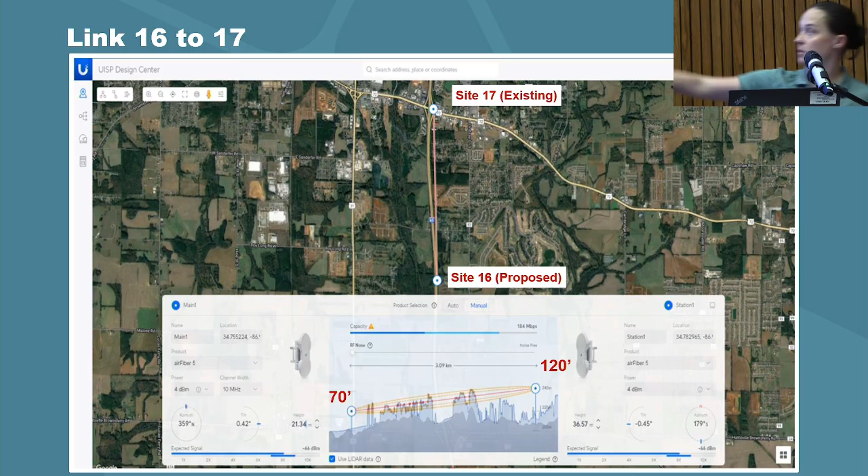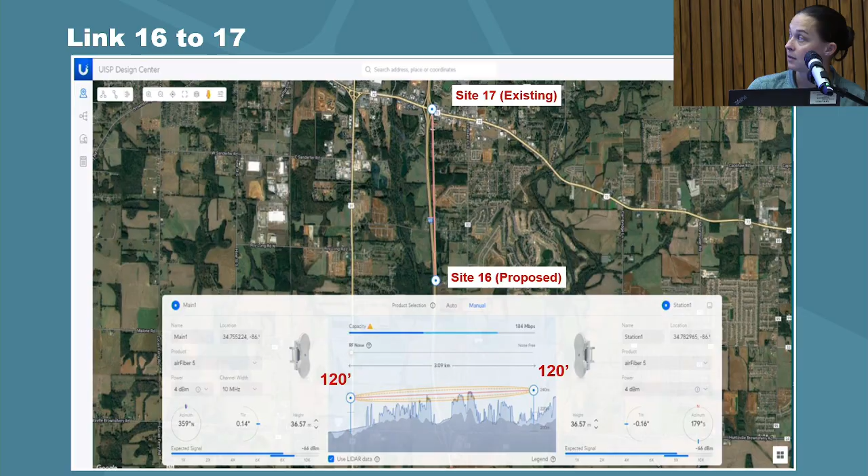So 16 to 17, you're able to do line of sight analysis. On the right there is site 17, that's an existing 120-foot pole, so that's set. We did a line of sight analysis at 70, and you can see there's just a crap ton of trees blocking the way. We even looked at a 120-foot pole at site 16, still not going to work. So if you look at it at site 14, clear as day. That was really cool to be able to adjust and go that way.

ALDOT's TMC, like I said, they pull in a lot of college students. We've been fortunate enough to hire on board one of them. One of their college students that was working in the TMC, kind of helping us a little bit on the 565 project. When he graduated, he actually came and worked, he works for us now. So he got to work with me on the design side for the 65 project once it started. He kind of got to come full circle.

Real-time coordination and information dissemination, right? They're pushing out messages to the DMSs. They're reading the data for the RWISs. They're helping emergency vehicles respond to incidences faster that they see on CCTV cameras, all of that kind of stuff.

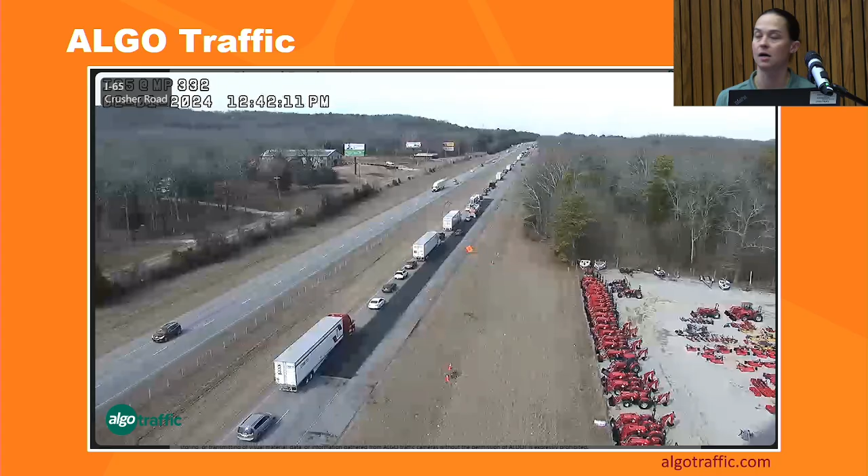Algo traffic, anyone in the public can go to algotraffic.com. You can see all of the cameras. Pretty cool live camera feed.

Plowing is a more streamlined process. Open trenching is about half the cost of directional boring, whereas plowing is a quarter of the cost of boring, so half the cost of trenching.

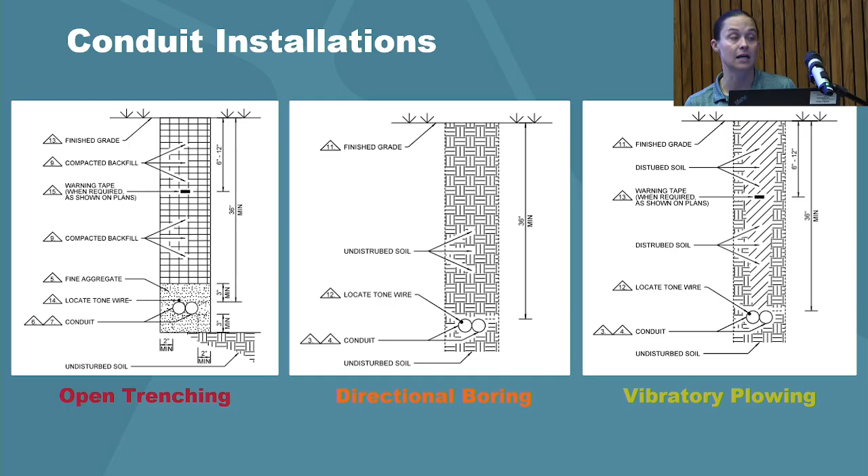On a typical open trenching installation, you can install about 1,000 linear feet a day. When you start getting into plowing, it's in the scale of 10 to 12,000 linear feet a day. So it really does make a huge difference, and interstate installations are just ideal for it because you can open it up and go.

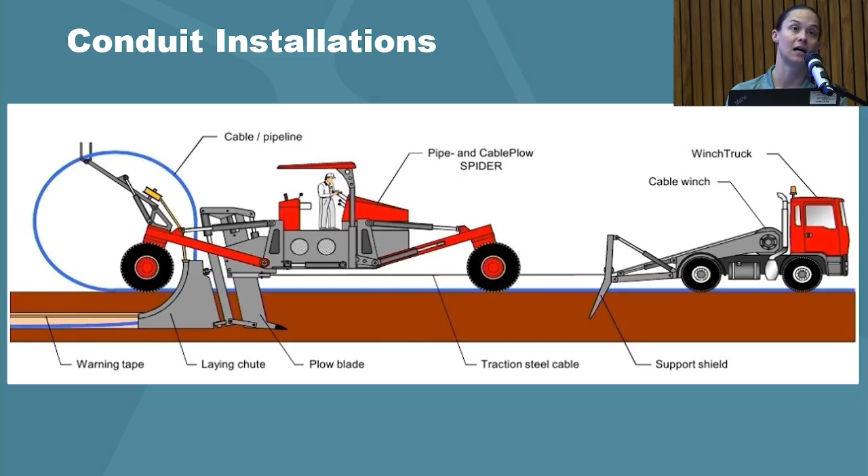So this is a plow. Sometimes they'll have a winch truck, sometimes the plow will have its own motor. But if you look over there on the left, you can see the laying chute. Basically that plow blade makes a small cut in the ground, and while it's cutting, it lays both your warning tape and your fiber cable at the same time, and it just drives along.

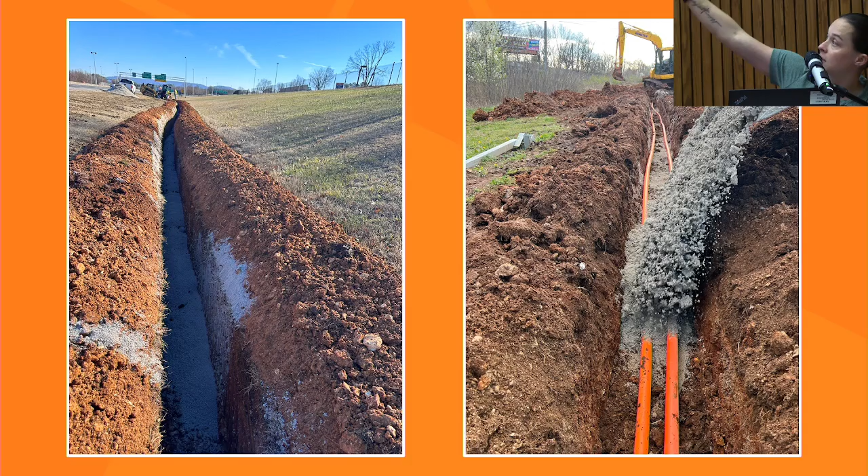Here is, again, our iconic rocket. So this is 565, they did open trench on this project. The plowing hadn't been installed yet, but here you can see the construction, the ditch. It's kind of hard to tell from the proportions of the photo, but it's a 36-inch deep ditch.

ALDOT specs require the fine aggregate to be 3 inches below the conduit and above the conduit as cover for trenching. They don't require that for plowing, so it's another huge cost savings when you get into plowing. That's what that gray stuff there is, it's that fine aggregate.

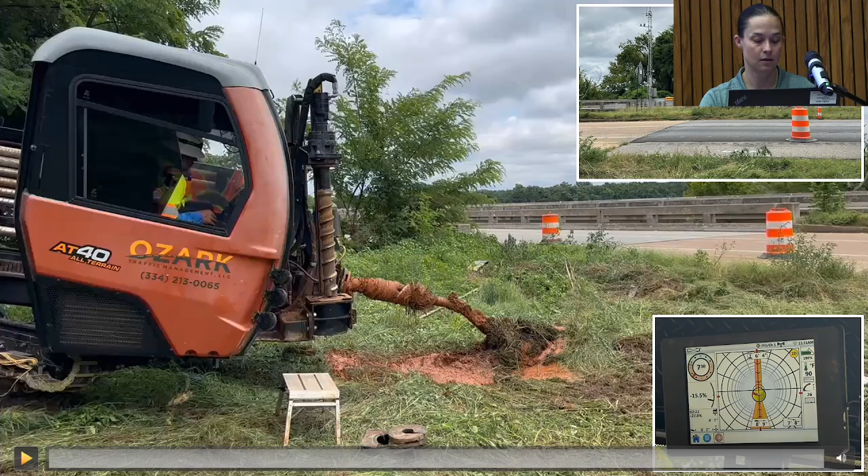Here is a directional bore in action. This was our 65 project, a couple weeks ago. We were out in the field with them. So what he's actually doing is boring under the interstate. Where he's shooting to is the median, and you can see the guys there.

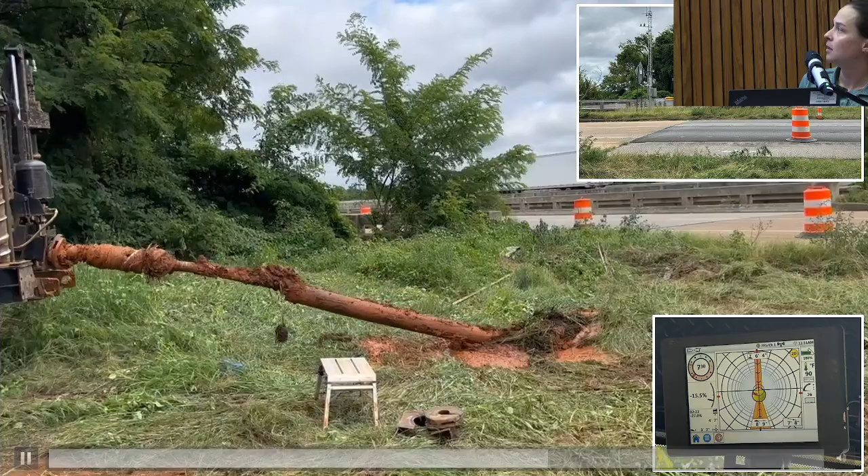We're providing fiber connection to the existing RWIS that's there. They had a cell modem there, and it hasn't been working for years. So they wanted to get fiber installed from the RWIS to a CCTV cabinet just downstream.

You can see he's pulling. Did it stop? It stopped.

No, it played through. So those guys on the other side of the street, you can see in the picture on the right, the conduit coming into the ground and going out the ground, and he's pulling it through. This is the screen inside that he's looking at. It gives you the exact degrees and the depths, and it was pretty cool to watch.

But yeah, they pull it out, and then they'll run your conduits and your fibers through there.

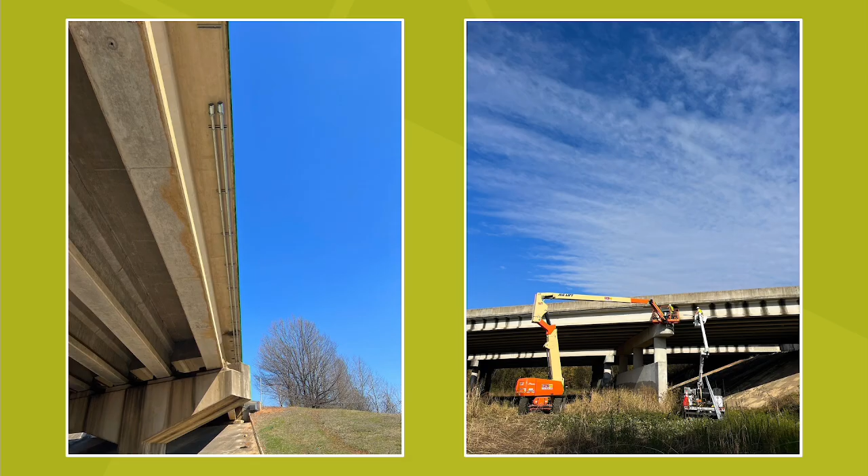Then we did have some bridge installation, so conduit attached to bridge structure. So that's them installing it. A pull box on the bridge, things like that. Lots of unique applications, and that's all I got.

Any questions? Yeah.

That's a good question. His question was how frequently do your cameras have to be placed to get 100% coverage? Typically a camera, a lot of it depends on client preference on how granular they're willing for their data to be. If you want a really good picture back at your TMC, you won't want to go over a mile, so that'll dictate a lot.

ALDOT was like, we don't care, we don't need to know what color the car is, we don't want to read a license plate, we just need to know if something happens. So if it's a little fuzzy, that's okay. So they were willing to go up to like 2 miles, 2+ miles.

And the drone helps too because it gives a good representation, because I didn't show it, but as part of the survey we'll zoom in and zoom out to see, if I'm zooming in on the roadway X distance away, what is my picture going to look like?